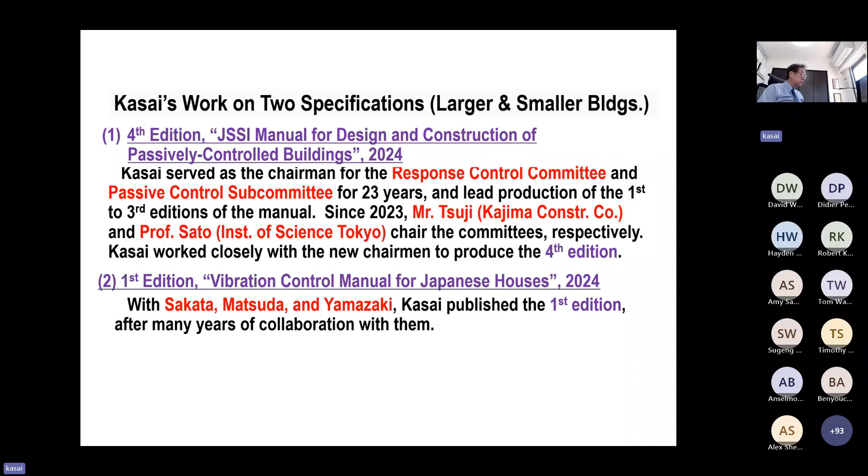Now, coming back to JSSI, the fourth edition includes these: oil damper, viscous damper, viscoelastic, steel damper, friction damper, and inertial mass damper. Today, except for this inertial mass damper, which is new, I cover all these dampers. At least I mention them because some of the examples use those.

Oil damper uses very thin oil without much viscosity, no viscosity. This one uses very sticky oil, which has a very high viscosity. And viscoelastic damper is more like rubber, having stiffness and damping.

Sometimes it shows an ideal ellipse. Sometimes it shows a rectangular hysteresis at a bigger strain. We call this nonlinear viscoelastic damper, which is becoming very common in Japan. And steel damper shows this hysteresis familiar to you. Friction damper shows this kind of rectangular hysteresis. And inertial mass damper, because of inertial force created inside, the hysteresis becomes negative - it has a negative stiffness in this one.

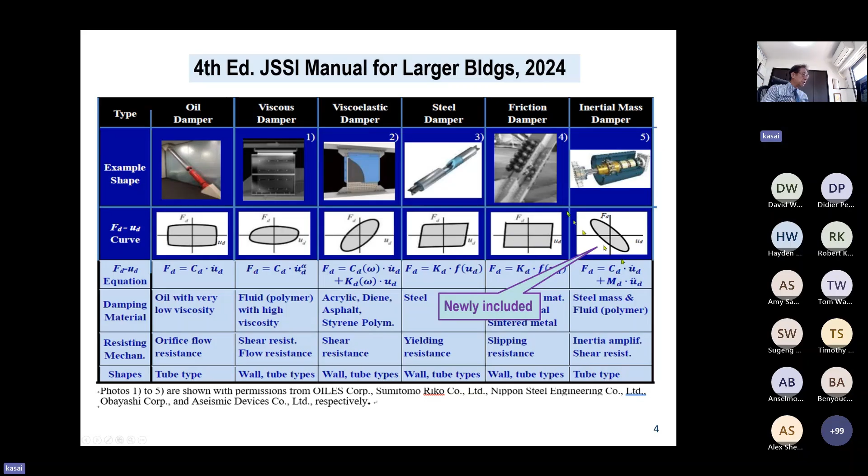Now, in addition to the dampers, we have various systems, which is very important. It's called directly connected system, wall type. It's connecting upper and lower beam. Therefore, story drift goes directly into the damper. Very, very effective. And brace type also.

The damper deforms most compared with others. And also shear link type. I want to show this and this too as examples.

And also stud type. This is indirectly connected system. The reason is that top story and bottom story drift, and you have a force here, and then this causes a bending of the beam, and also column too, due to the damper force. Therefore, damper does not deform as much as these, not ideal.

However, architects like those because of the openings. Also, bracket type, I call knee brace. And this one also, sometimes they prefer, but it's not so effective because, again, this pushes the column and the column deforms. This deforms less.

Special system, toggle type, amplifier type are called. So these systems I'm going to cover today.

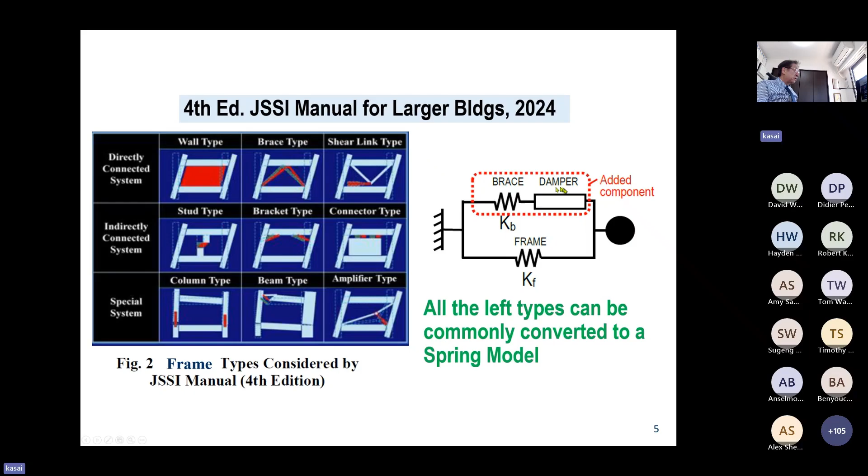But in those systems, very important, just like I say here, if there is a damper here and a brace here, if the brace is soft, then the brace deforms and the damper does not deform, then it's not going to be effective. So like this one, if the damper deforms, but the other one, this is like a brace, if the brace deforms, it's not effective. So this is what you have to consider.

And also KF. If KF is very, very stiff, like a concrete building, then these cannot take so much load. Most force goes to frame, then the damper is not effective. Therefore, damper and brace must be stiff enough.

So in summary, the vibration control effectiveness depends on balance of three properties: brace stiffness, frame stiffness, and damper property or stiffness. So considering that and an ideal response spectrum, we develop performance curves.

This is showing displacement reduction here and force reduction relative to 1. That means if you have no damper, the force and displacement are 1. And if you use a damper, for example, this Ka divided by Kf, there is a Kf only here. But if Ka, damper stiffness, increased, the displacement decreased.

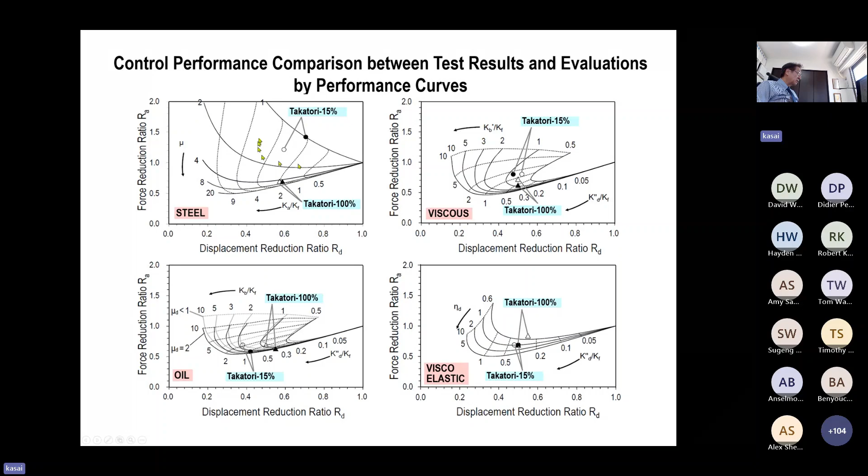So this one really talks about the balance between brace and damper. The brace effect is included here inherently. Okay. Then,

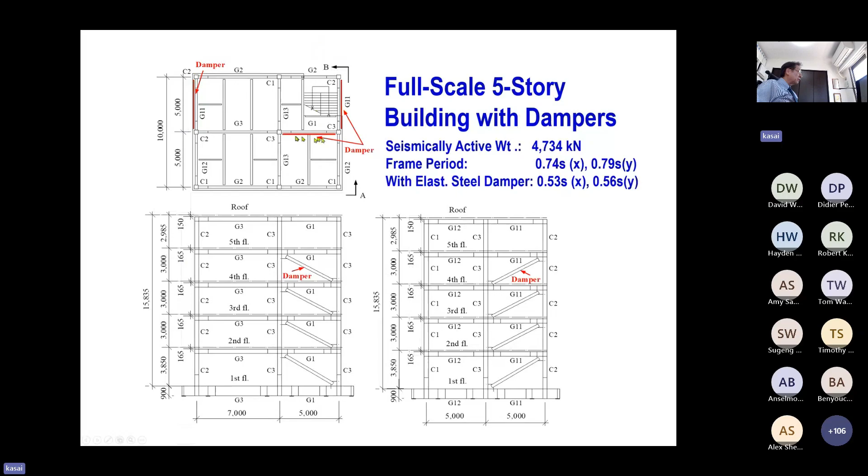For example, we did an E-defense test for the 5-story full-scale building. I was a team leader for this one. And there are dampers here and here. From 1st to 4th story, we had dampers. There are 2 dampers in this direction and 1 damper which is 2 times bigger in this direction. And we compared that one. I'm sorry, I think I'm skipping that.

Okay, we compared that damper with, for example, here, our prediction with result from E-defense for damper yielding and developing ductility of 4, which we consider is best for the steel damper. And so it worked very well.

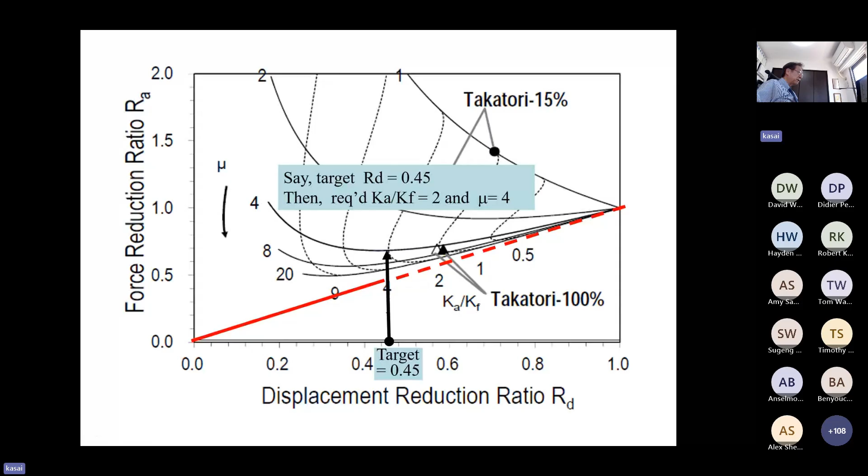We confirmed with other viscoelastic ones, oil damper, and viscous damper. I'm going to skip those. The important thing is this performance curve can give you, for example, the difference between a free steel damper and a friction damper. Both are considered to be bilinear dampers.

If the displacement is reduced to 0.45, then we have multiple solutions, design solutions. One is to use ductility 4, with this stiffness, Ka over Kf equal 2. And another solution is here: Ka over Kf equal to between 2 and 4. So it's 2 and 4, so 3.

And in this case, as you can see, the damper is stiffer and exhibits more ductility demand, mu equal 8. Steel damper cannot tolerate such a big ductility demand, but friction damper can. And so, but the friction damper has to be stiffer. So this one is a very important aspect.

As long as you can make a very stiff elastic stiffness, then the required damper force here - this is a frame up to this drift - and so frame force is this one, but damper force is this one. This is friction damper force, and this is steel damper force. So you can see that the required damper force for the latter, friction, is only 50% of the steel damper. And so sometimes, of course, steel damper is very preferred very often, but friction damper has advantages like that.

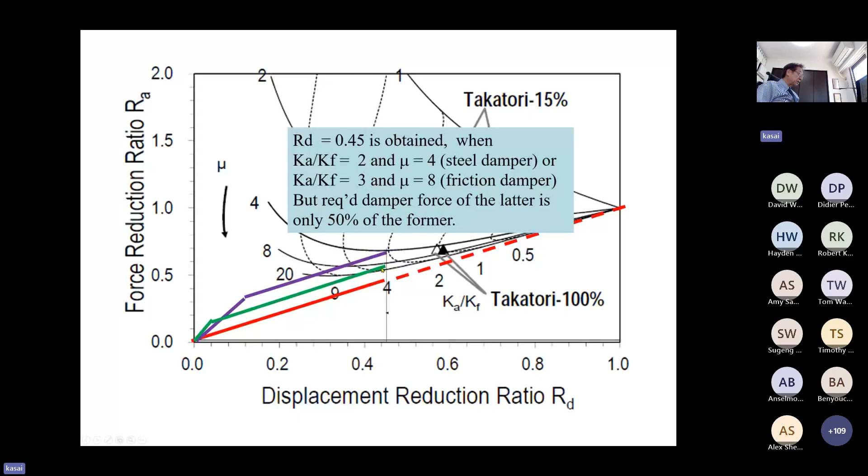I'm going to show that example later.

Now, I guess an overview of RC building retrofit methods in Japan. These are probably very similar to yours, so I'm going to skip through quickly.

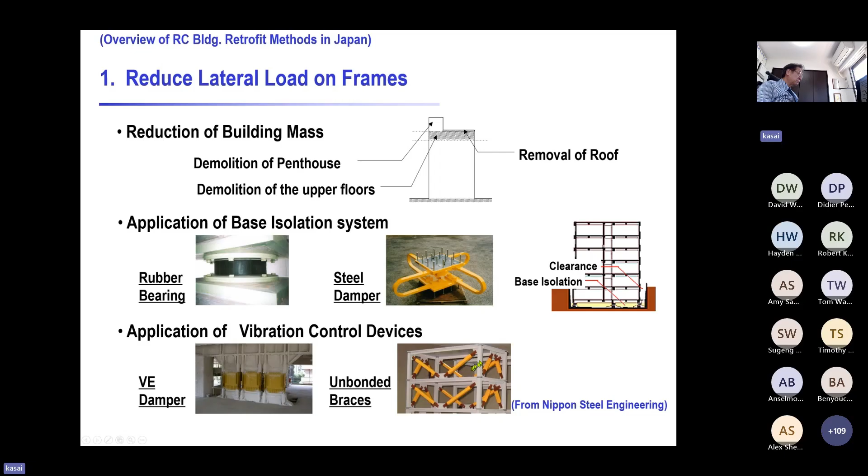Firstly, number one is to reduce lateral load on frame, which is very important. Mass reduction can do that. Another one, base isolation can do that - it can reduce the force on the frame. Also, put in a vibration control device, and it takes the force. As long as this is stiff enough, the frame force, lateral force on the frame, will decrease. So that's reducing lateral load on frame.

Another one is to avoid concentration of force and deformation into the column. Even without a damper, we have to do this, right? You want to prevent shear failure of short columns. And overall, avoid concentration of deformation into columns due to building torsion. In the Christchurch earthquake, you had this - the CTV building collapsed just because of torsion. Exterior columns got so much deformation demand.

Another one, E-Defense - I conducted tests and just let it collapse. A soft story: the first column got concentration of deformation. Another one, pounding during Mexico City - I worked on pounding too. This is the case where the floors are at different levels, so some floor of one building really hits the middle height of the column of the other building.

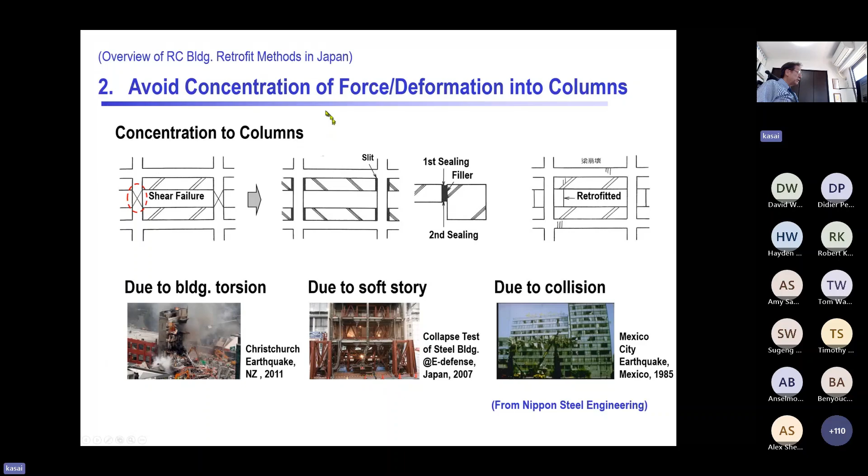So you really have to avoid concentration of deformation into columns, whether damped or not. This is very important. The third one is to strengthen frame members, each local strengthening. For example, if a column is too slender, you can make it stronger, with steel sheets for beams and columns like this, and also carbon fiber, etc.

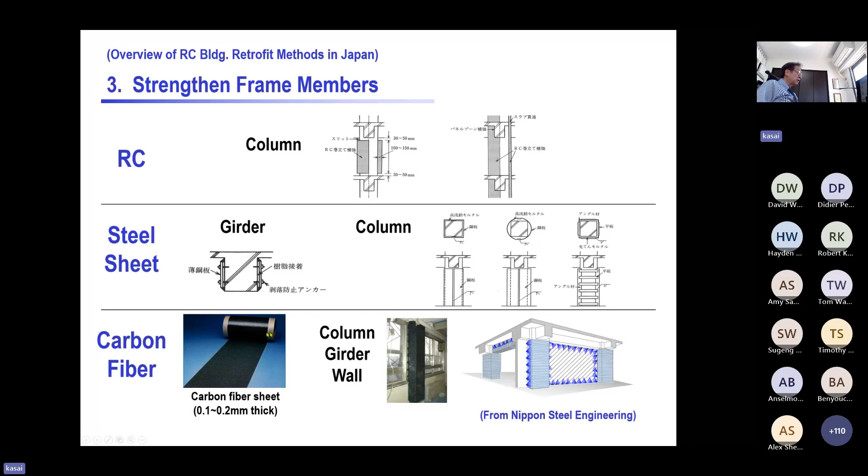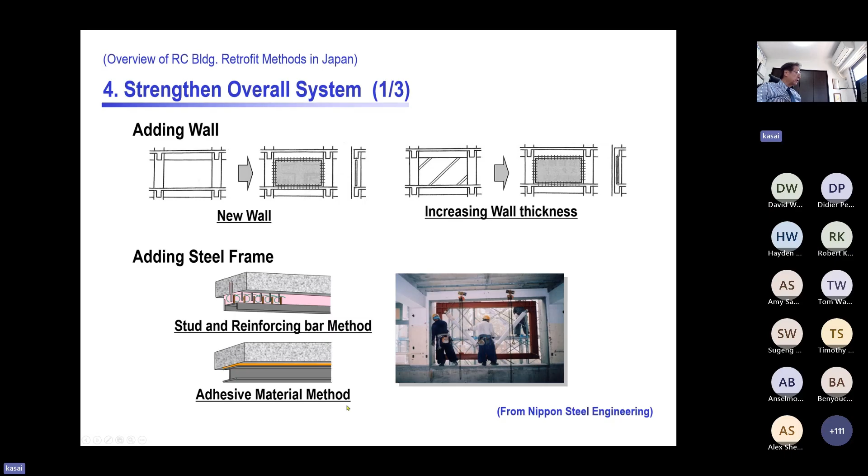Then finally, after members, you can look at overall systems. For example, if a wall is not there, you can put a new wall, or increase wall thickness by adding concrete. This is very often used for dampers - adding a steel frame. The steel frame takes the damper force, and is attached to the concrete frame using studs and spiral reinforcement typically, or using adhesive material. These techniques are used for dampers.

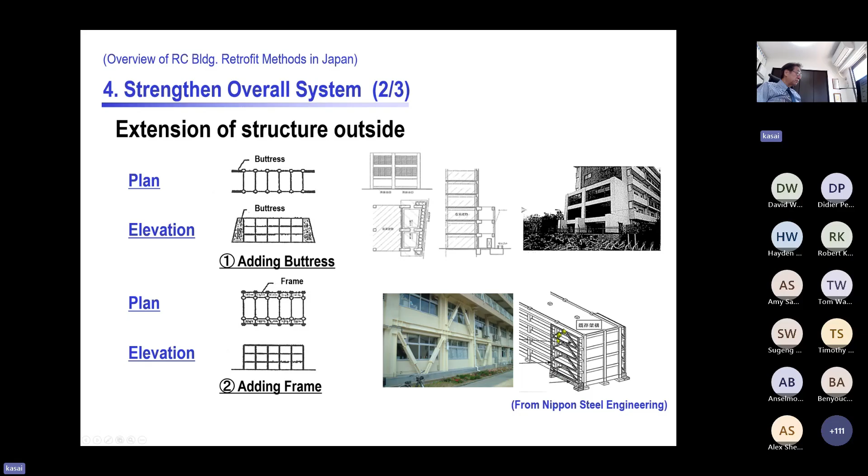Now, strengthening the overall system, second one: you put the buttress on the elevation and plan. For example, in this case, the balcony is too thin to translate damper force to the building, so you have to increase the thickness of the balcony and slab on the elevation. Okay, you add this one. That's what I'm going to show.

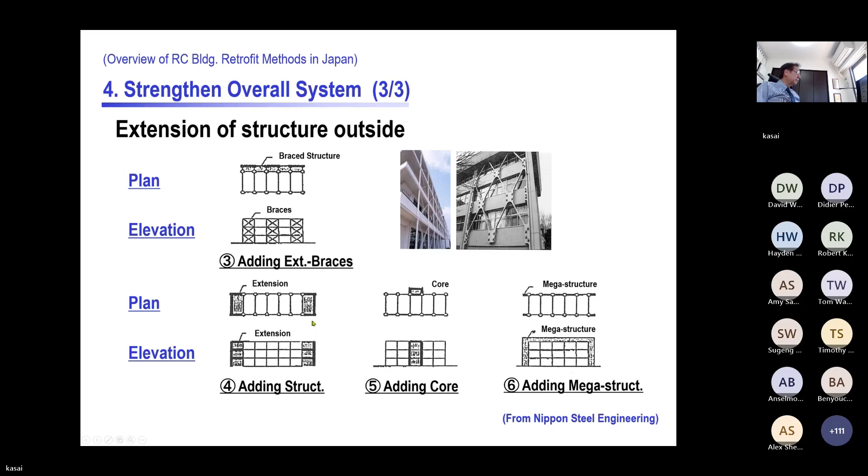And number three: extension of structure outside, brace structure, adding external braces, adding a core, adding structures if you have some space. Okay, so much for the fundamental ones.

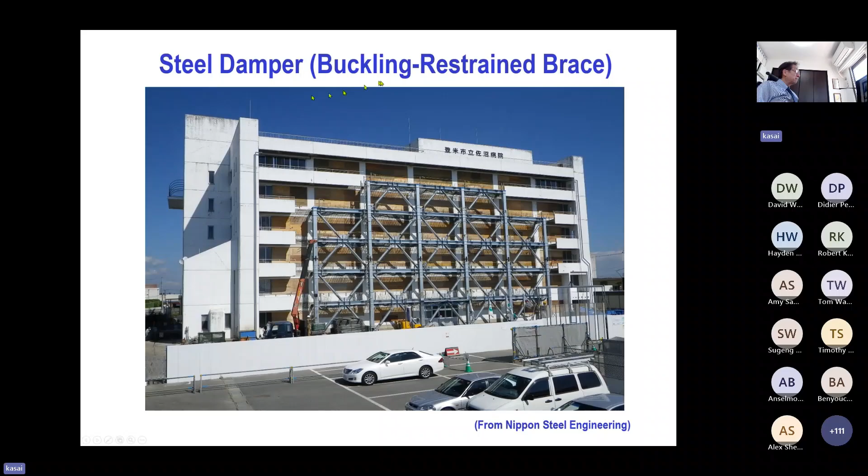Let's talk about four retrofit schemes. Now, the first one is a steel damper, buckling-restrained brace. This is outside the frame, and there's some space here between. So they try to use the floor slab and balcony to connect this one - just to utilize the balcony, yeah.

Another one - I want to go through this quickly because it's the same with this friction damper regarding how to connect. Now, steel damper, buckling restraint brace, I assume everybody knows about it, so I'm going to skip it.

But this friction damper, there are many types of friction dampers. Especially this one from Professor Kitajima, Nippon University, who used to be an engineer at Asunaro Aoki Construction. By the way, I have to give credit to Nippon Steel Engineering on this one, producing the buckling restraint brace, and they gave me this presentation. This one is from Kitajima, and this is the mechanism.

When an earthquake comes, this exterior or interior cylinder moves right and left. Then the copper is attached to the outer cylinder, and steel is attached to the inner cylinder. There's internal pressure created when they insert copper into the ring, and it's tapered, so that's very simple. Then you get a very big fastening force, multiplied by a 0.3 friction coefficient, which would give you the damper friction force.

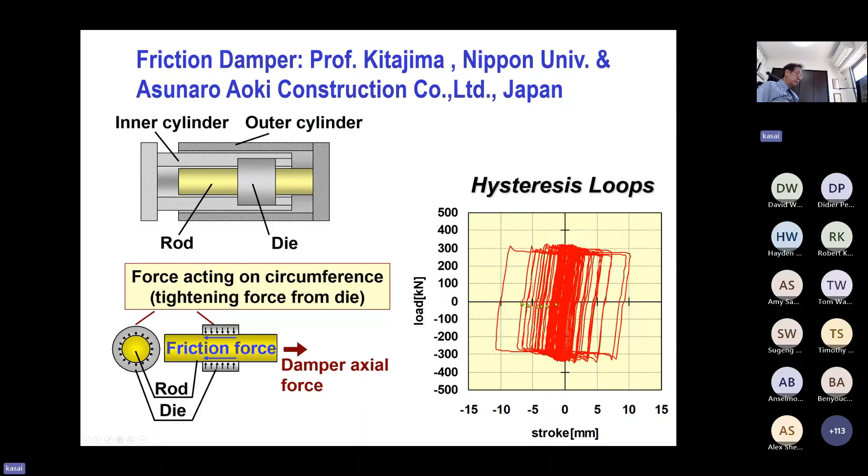But this one cannot be so big, and it's probably limited to 300 or 400 kilonewtons. So you have to use many, which is sometimes advantageous, sometimes disadvantageous, but okay, here is one.

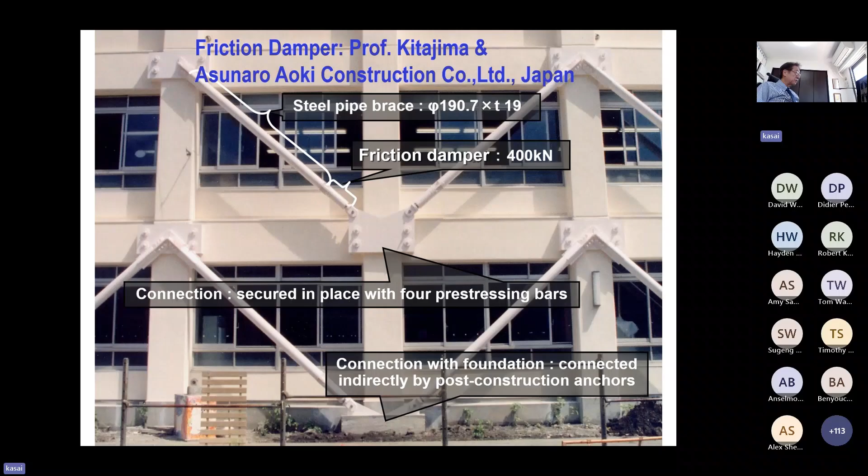In this case, the friction damper here is 400 kilonewtons, and the steel pipe is 190 millimeter diameter. The connection here - just because the damper force is not so big, the connection can be very simple. You have 4 studs, 4 anchors, and a pretension, post-tension bolt. That's good enough. And this is the process.

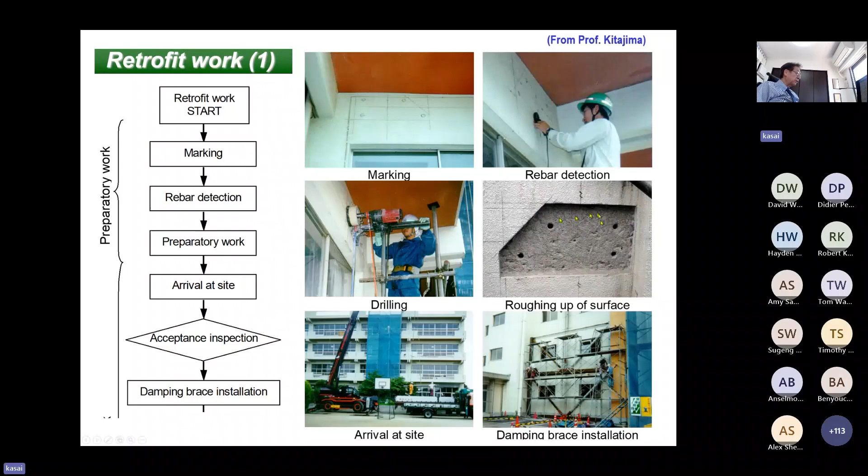This is typically a school building. You create the 4 holes here after rebar detection, drilling, roughing up the surface, and grouting it, and then you attach this.

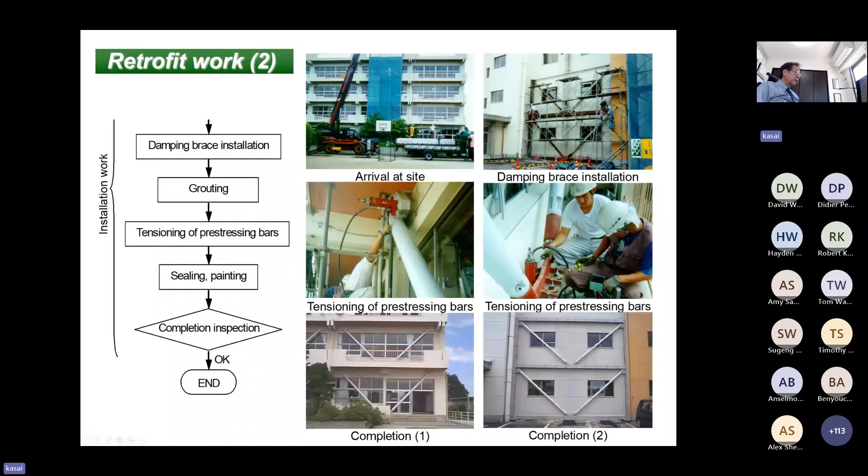A very interesting pseudodynamics test was conducted on an existing school building, three stories, which had to be demolished. They cut it here and here so they could put one brace here, and assuming there are many braces they could attach, they wanted to see the typical behavior of this building by pseudodynamics.

They put the actuator here on this remaining building, so it can push and pull the roof. This damper works very well, and we can measure the force of the damper by attaching strain gauges on the brace. But other forces we cannot measure.

However, if you apply top force only, the shear force of every story is constant, the same. But the damper takes this one, so the remaining part is the frame force.

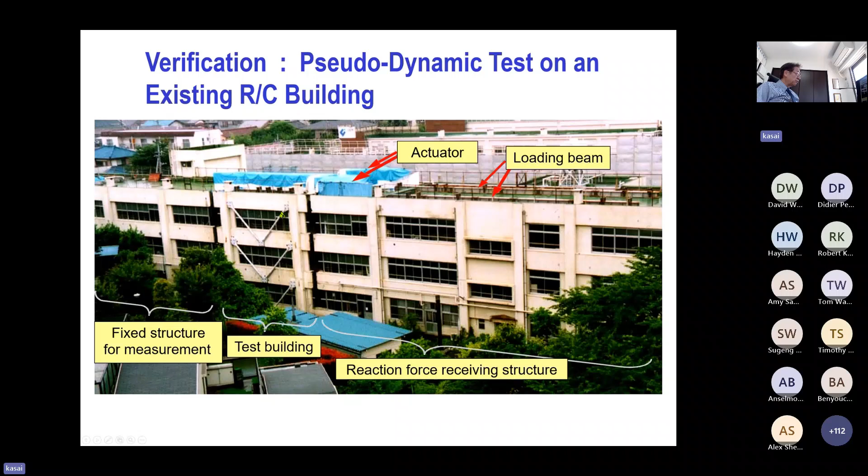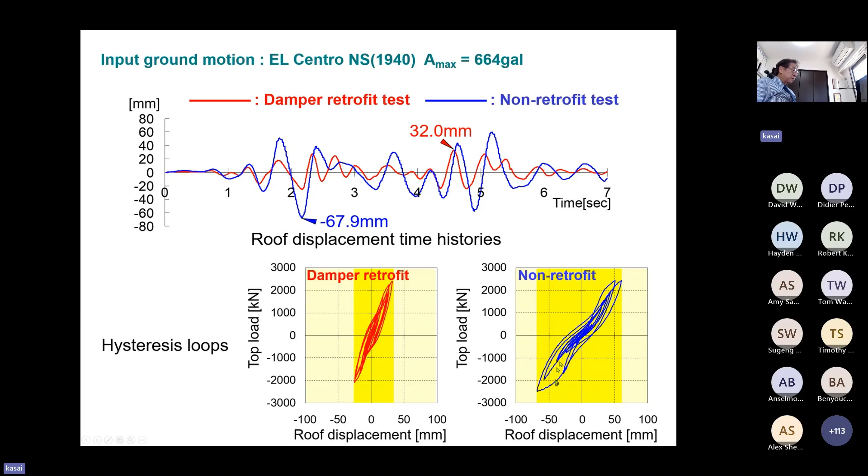After that, this is the reaction force. Of course the actuator can also measure the reaction force. So the actuator force showed this much force, almost similar. However, deformation is very big for the non-retrofit case.

They also measured damper force for the second story, and by taking out the damper force from the applied story shear, they could get the frame shear force. So when you have a damper here, you can reduce the seismic load on the frame like this.

Therefore, the frame tends to be almost elastic compared to the non-retrofit case. After this test, they removed the damper and conducted a non-retrofit test. Again, the force goes like this, and the deformation is more than twice.

If you add the force this and this, it's almost the same. However, the deformation can be very large compared with this one.

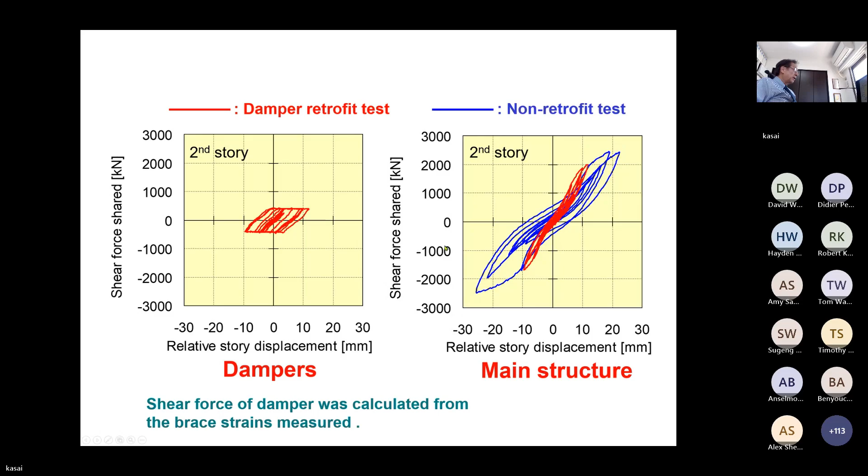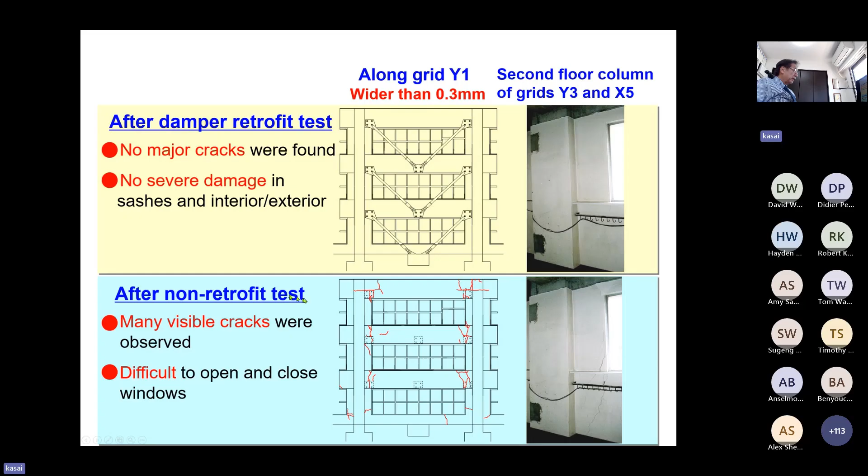This is also evidenced by cracking. With the damper, they could not see any severe damage. But after removing the damper and conducting the non-retrofit pseudodynamic test, they got lots of cracking.

Okay, so this is so much for the friction damper case using brace type, and also the steel damper case using brace type.

Also, an advantage of this toggle system is that each component is smaller, so they assemble that on site. They can transport it relatively easily to the site.

And the toggle system was used for Sendai City Hall. Sendai is often shaken by strong earthquakes, so city officials decided to use the toggle system.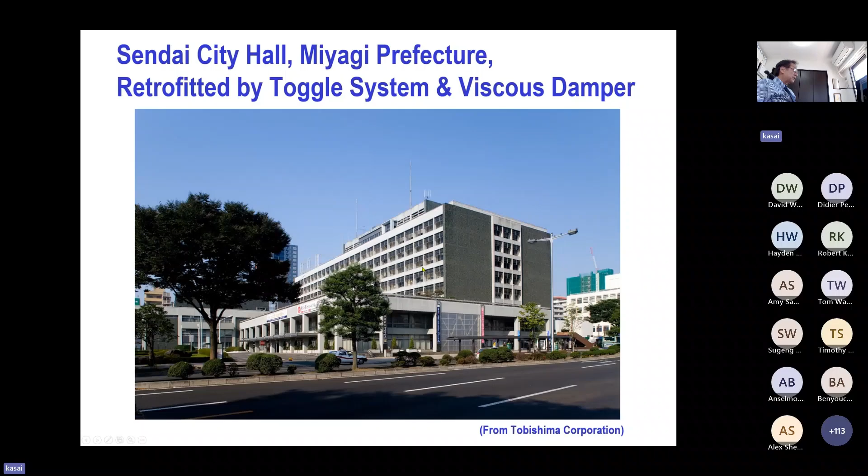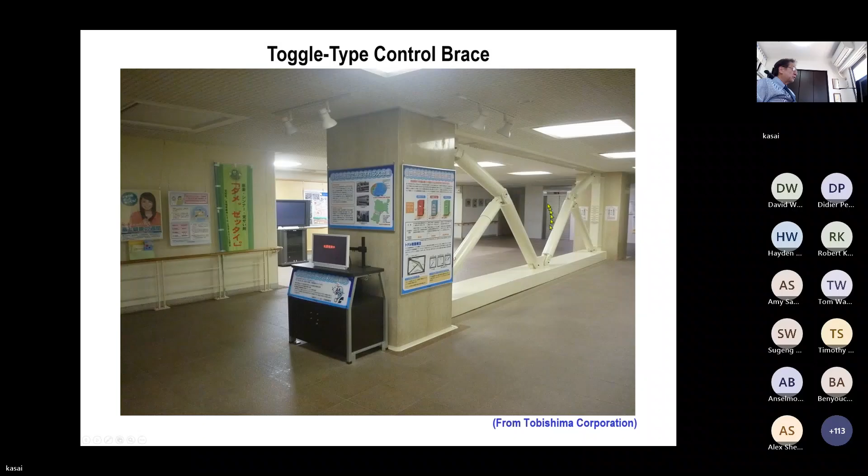Somehow the toggle system was put on randomly. I guess maybe there are some reasons. There was also some wall added. This is a typical view of the toggle system.

Kasai laboratory got some records of this building after retrofit, from the 2011 Tohoku earthquake. We processed it so as to get the damping ratio. The damping ratio is about 11% for the first mode, which is very nice, so the damper is working very well. And the frequency is 1 Hertz.

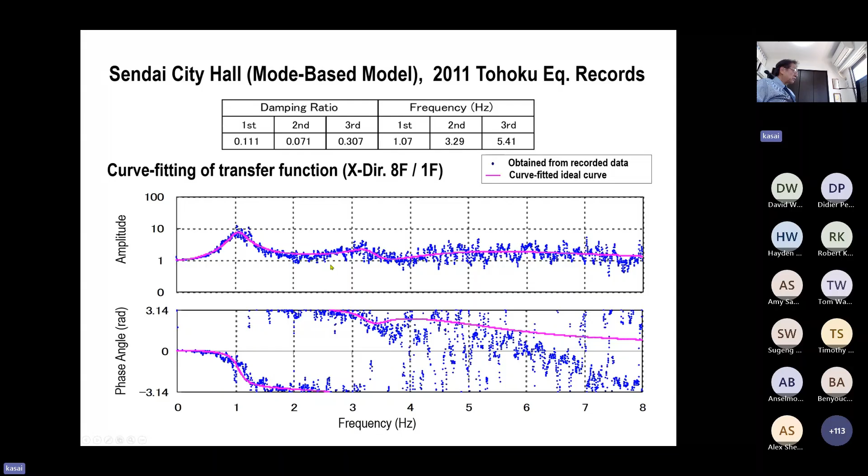That means we can use a model based on this. I'm going to show later. And this one, individual elements are modeled.

They made a shear model, but then every story you have to make it. This is 8 stories, and therefore you have to stack 8 stories. But this model is very detailed.

For example, slackness occurs here. There is a pin joint, there are many pin joints, so you have to model the slip.

You also have to model the flexibility of the brace. They can deform. Therefore, if they deform or there is slip going on, then the damper does not deform as much as you think, ideally. So it's very important to characterize those.

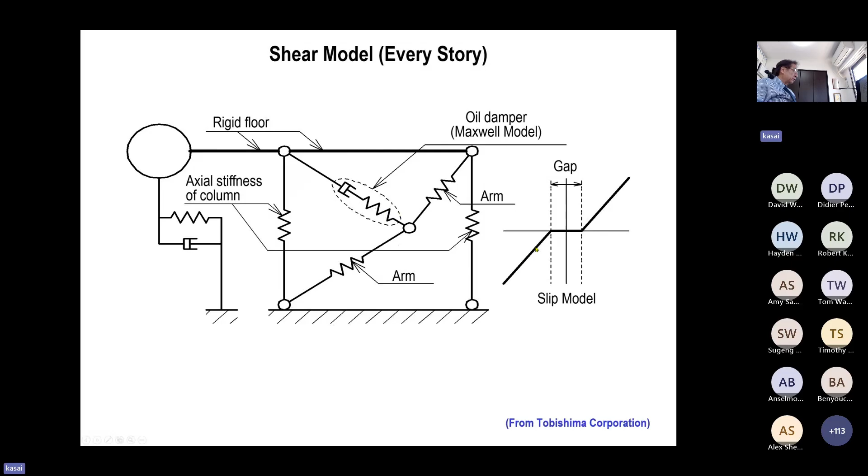And this is a result. Because of shortage of time, I'm going to go through this very quickly. The conclusion is that the building behaved almost linearly.

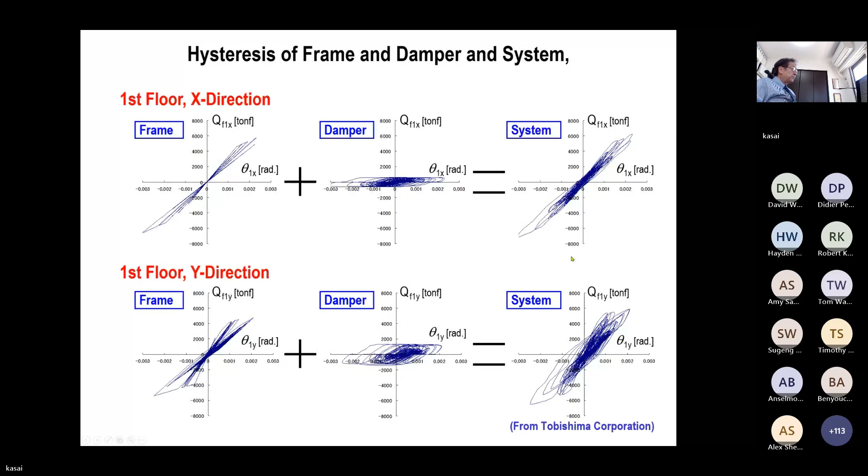This is a record versus analysis of the shear model. The record is in blue color, showing the relative displacement of the top floor, which was a double integrated result of the absolute acceleration, and also the absolute acceleration of the top floor.

Analysis seems to work well, except for this one. Mode-based model, of course, works reasonably well as long as the structure behaves roughly linearly. That's what I showed. Therefore, displacement of the top floor and also absolute acceleration of the top floor were very well predicted by the mode-based method.

And this one is very easy. So after the Tohoku earthquake, our laboratory really processed many buildings using this method, because it can take only half a day to make a model. But this shear beam model takes maybe a week or more.

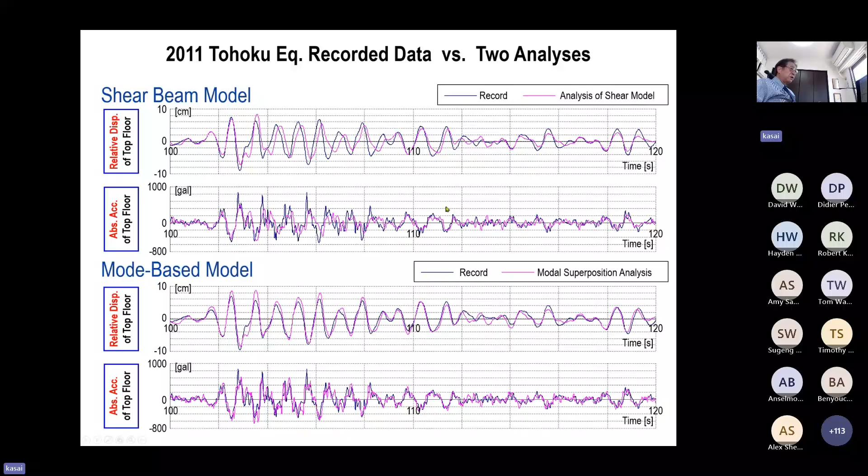But the shear beam model is very advantageous because, for example, once you analyze with a damper, you can also hypothetically analyze without a damper. And of course, the modeling is concrete, and concrete, after a certain limit, for example 1/150, really deteriorates. Therefore, concentration of damage to a particular story level happens, and this is really why we need to retrofit reinforced concrete buildings.

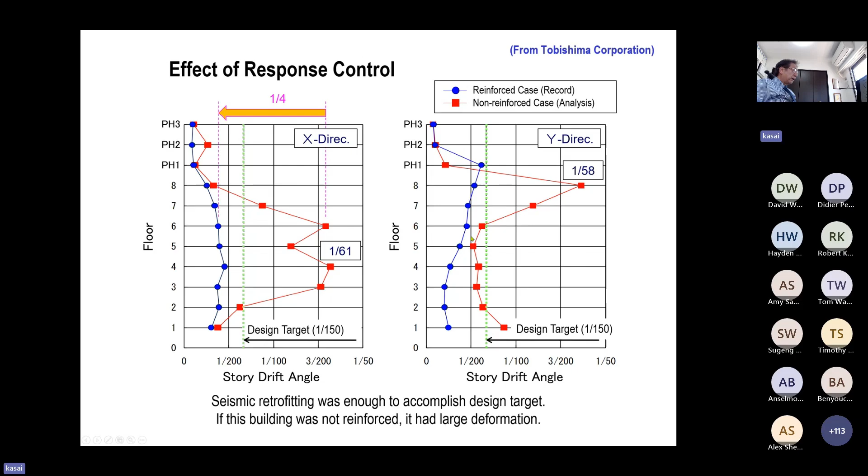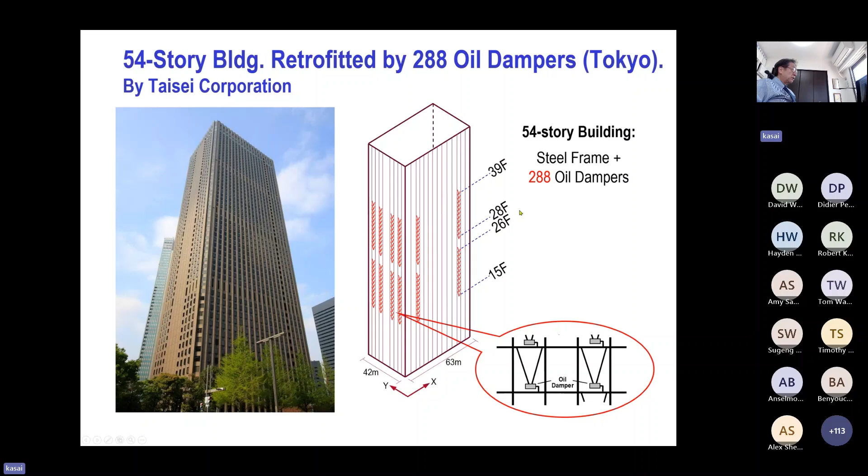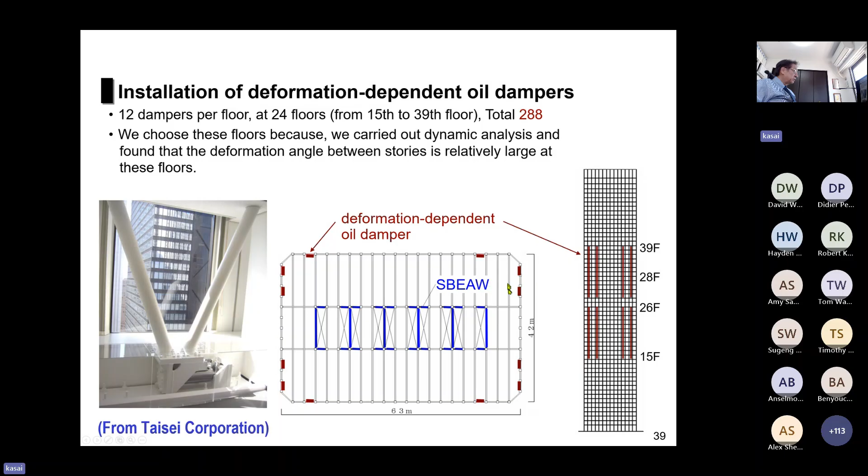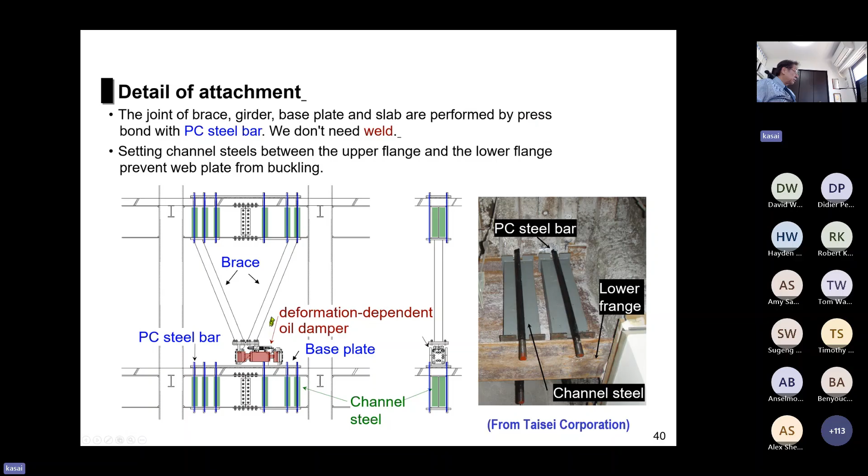This is not reinforced concrete, but a steel building. 288 oil dampers are used by Taisei Corporation, and this is a view. Actually they used the short span beam and put the damper inside. It's so close to the window that people could work in the daytime, so they did the installation only at night. They didn't use welding at all; they fastened through the slab to the steel beam by post-tension. This is the way they conducted it very effectively.

And there was a record, so we processed it using the mode-based method like I said. What we found is that our method worked very well matching the record, it correlated very well. After that, we found the damping ratio was about 3 or 4%. But we assumed 1% in that model. That means we used the same vibration period and mode shape, but we reduced the model damping ratio from 3-point-something percent to 1%, which is very typical for the undamped case for a tall steel building.

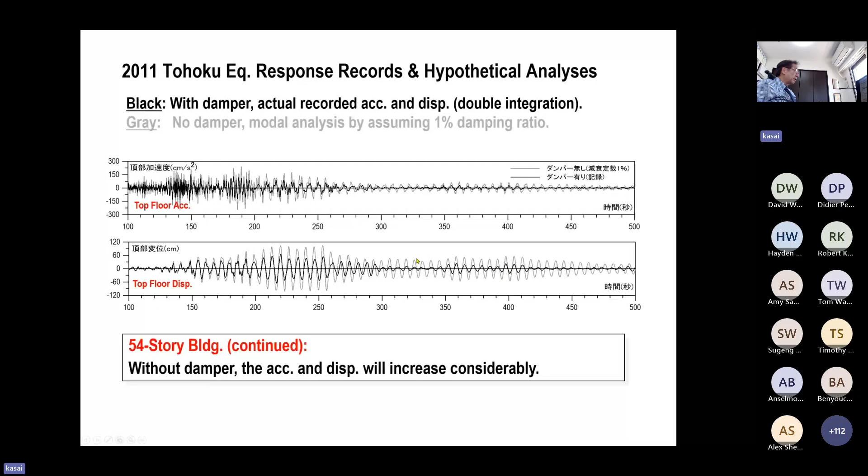Another thing is that after a certain number of cycles, you see that the one without the damper still vibrates, going through many, many cycles. That frightens people, and it can also create fatigue problems in the building and its non-structural components. So the damper's effect is very well explained by this.

Okay, finally, mitigation of torsional damage and collapse. I'm going to show two retrofit examples.

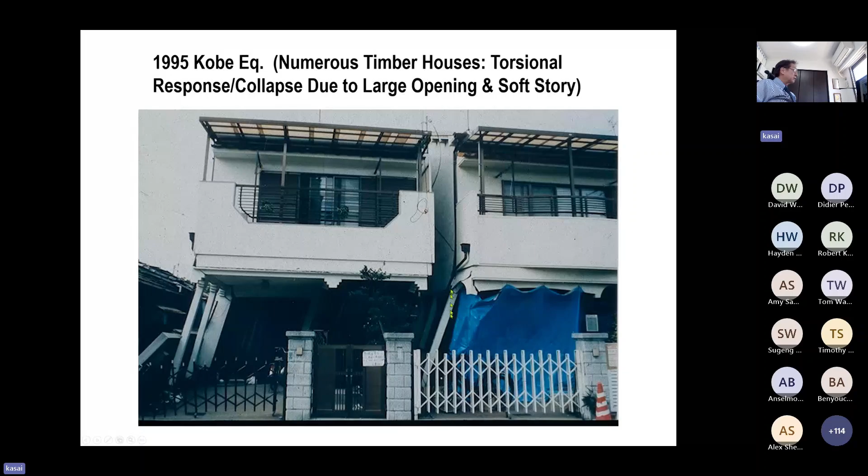There are also many houses like this. You have to have an opening because of a garage they want to use, so this side is very flexible while the other side is walled. So the building twists and collapses like this, just like torsional failure combined with a soft story column.

So working on houses, as I mentioned in the beginning, we explored how to address this using a knee brace type or bracket type, as we call it. We found that as long as we do it carefully, we can achieve a very good effect. Firstly, we found a very fundamental fact.

The problem here is the stiffness center. The center of stiffness is biased relative to the mass. Therefore, the translation and the rotation of this part work in phase, and this causes a lot of displacement here. Translation and rotation are in phase, therefore you have very excessive column deformation and story drift here, and very small drift here.

However, if you put the center of damping opposite to the center of stiffness, intentionally creating out-of-phase motion, it's a non-proportional damping case. Then you can eliminate the in-phase movement, creating out-of-phase movement instead, which can minimize this rotation. If you add this together, you will see that the translation is very, very minimized on this side.

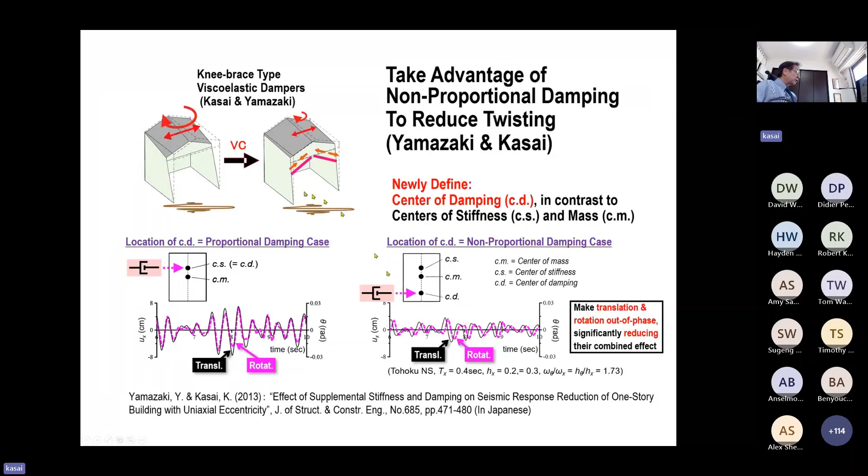Okay, another thing we have to be careful about is, as I mentioned in the beginning, you have a damper here and a column. The damper deforms, but the force applied makes the column deform too, so the damper cannot deform as much anymore. If the column is stiffer, the damper can deform more. So if the column is really strengthened, the damper can deform more. Therefore, the key point is really to keep the surrounding frame column very stiff.

So that is just our preliminary study. And after that, we got a practical opportunity.

13-story building retrofit using steel damper and stiff viscoelastic damper, reduction of torsional response, by Kasai, Motoyui, and Building Structure Institute. The presenter is our student.

Tokyo has been allocating $300 million a year to retrofit buildings that face emergency transportation roads, essential for post-quake recovery. During the 1995 Kobe earthquake, many buildings fell on such roads. Also, a building at the corner can interrupt two roads at the same time, which is very bad.

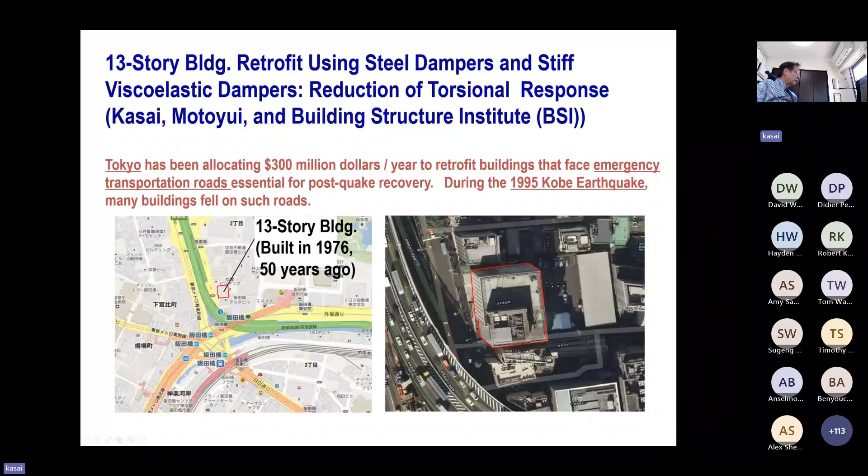So a 13-story building built 50 years ago, the owner decided to retrofit. This is the building.

Here is a stiff part, and here is the open part. Fortunately, inside there are beams here, and we can put the stud column, a stud damper, just like this. So we explored that option. There are 7 stud dampers in between the columns.

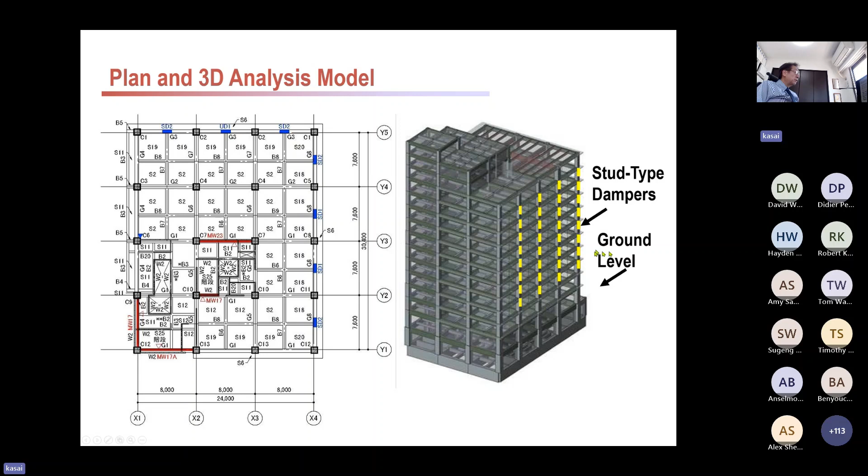And this is the one, the column, typically this size, and the beam is somewhat long span. Therefore, as I said earlier, we have to be careful. This stud damper causes overturning on this beam, and with such a long span, even though you have a haunch, it deforms and rotates. Therefore, it can reduce damper deformation and energy dissipation. So this is a disadvantage.

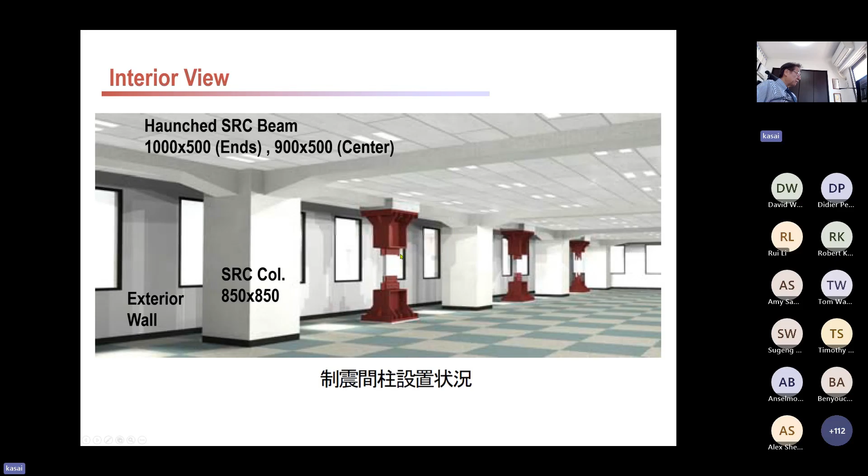However, it looks much better compared with a brace, and people liked it. Very typical detailed finite element analysis was done in order to fasten it to the existing beam.

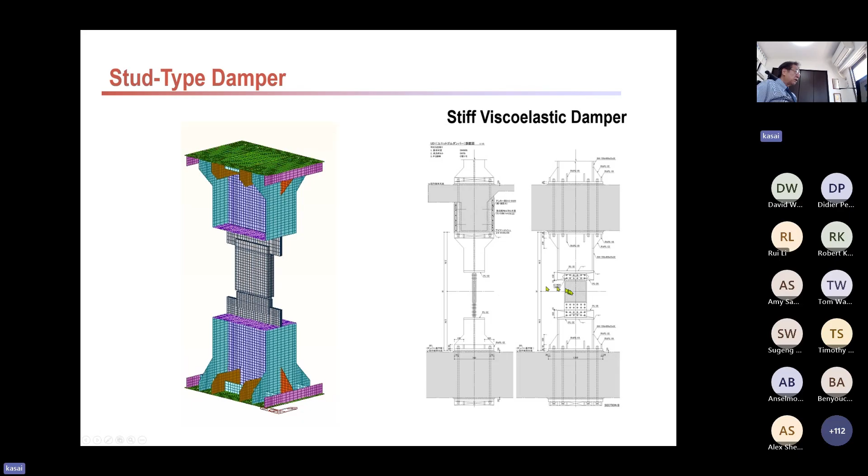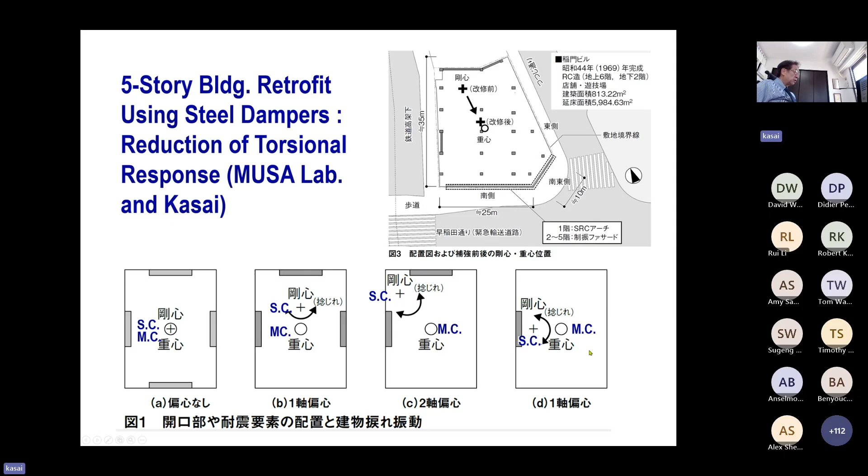Just these two surfaces were too flexible laterally, so we decided to put a very stiff steel brace. You don't need to put fireproof paint because outside they use weathering steel. You can see the color of the weathering steel.

Also, the force was directly going to a very stiff arch we created so that people could still access the building. Here, it was cantilevered, so it was really torsionally defective because only the inside column was taking the force.

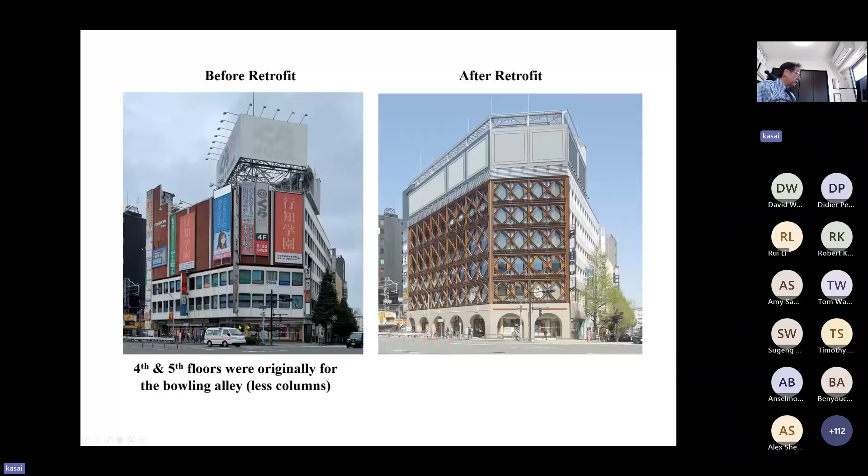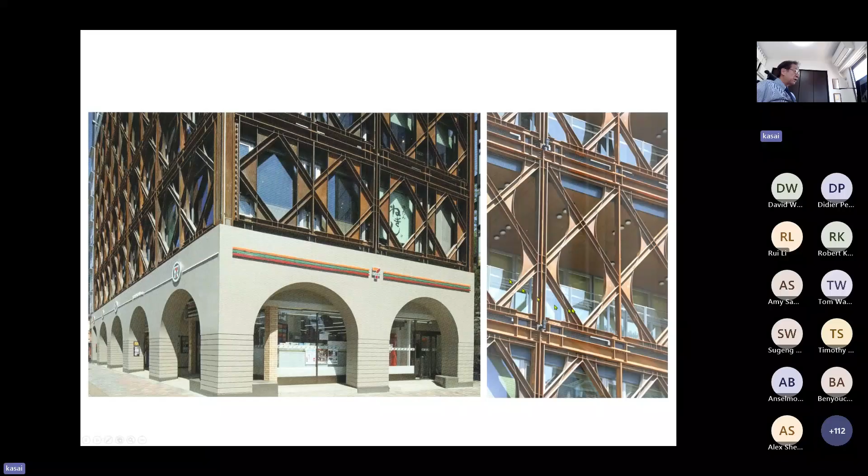This is a view of that steel truss. The damper you cannot see is in here, but I want to show it. Here is the damper, and still you cannot see it. Okay, here it is - this is the inside view.

By the way, this building got an award for the retrofit, the best award that year. The architectural design was done by a very well-known architect who also designed a pavilion for the Expo in Osaka.

The idea is this: originally all the building had an aluminum facade, which is very flexible. But we utilized this beam and fastened the steel beam here by stud. So here is the damper here.

Again, on the first floor, it was transferring seismic force from this slab to the internal column, which is very weak. Now this one directly takes force through the arch. This is the idea.

This upper beam is connected to the upper floor, and the lower beam is connected to the lower floor. This one is very stiff. Therefore, when an earthquake happens, this one is stiff but still deforms, and it is stiff enough to cause inelastic deformation of the link. We call this the link, or shear panel damper.

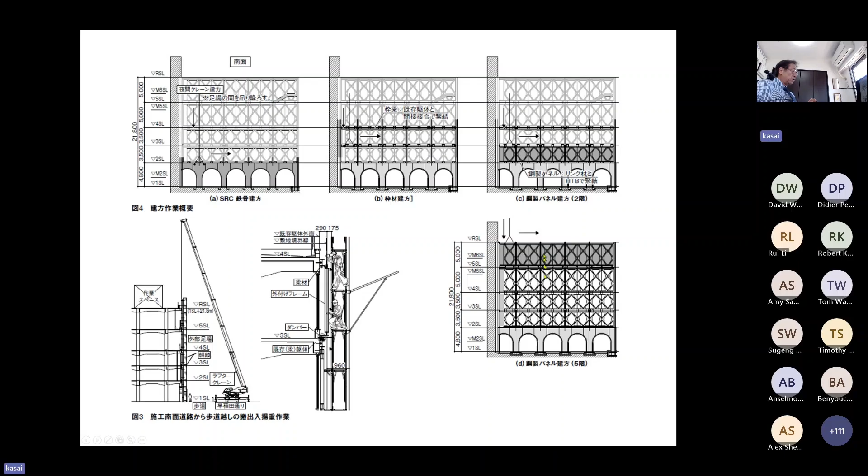Now this is the result. Let's look at the roof displacement. With x direction input, after retrofit—sorry, this is the third floor—after retrofit you see it goes like this, but before retrofit it goes like this. Just like I said, it's a two-way eccentric case.

So x direction input can cause y direction movement too, plus torsion. Therefore it's very complicated. This is a y direction input. After retrofit, it goes in the y direction only, not x. But before retrofit, because of the biaxial eccentricity, it goes like this, and deformation is about twice compared with the retrofitted case.

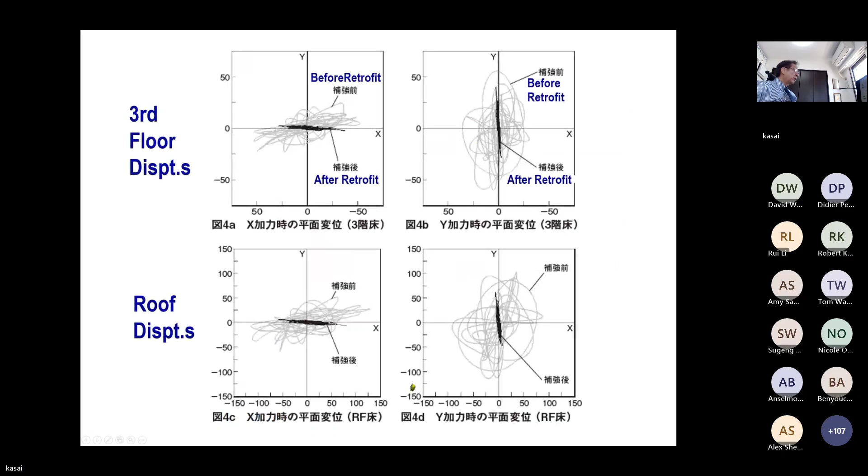Same thing with the roof. So overall, this three-dimensional analysis proves that our method of providing an exterior very stiff facade with many dampers works. There are 56 dampers; at every story level we had 14 of them. On the other side, you have a smaller facade, which has only 6. So in total, 56 and 18, 74 small shear links are used successfully.

Now, for the shear link, you know how to design it. This is a report published by Kasai and Popov, giving the proportions of the link. You have gamma A, the allowable shear strain, in terms of H over TW. For different aspect ratios D over H—1.5, 2, and 3—this is from Kasai and Popov's formula, now used by UBC and other American codes like AISC.

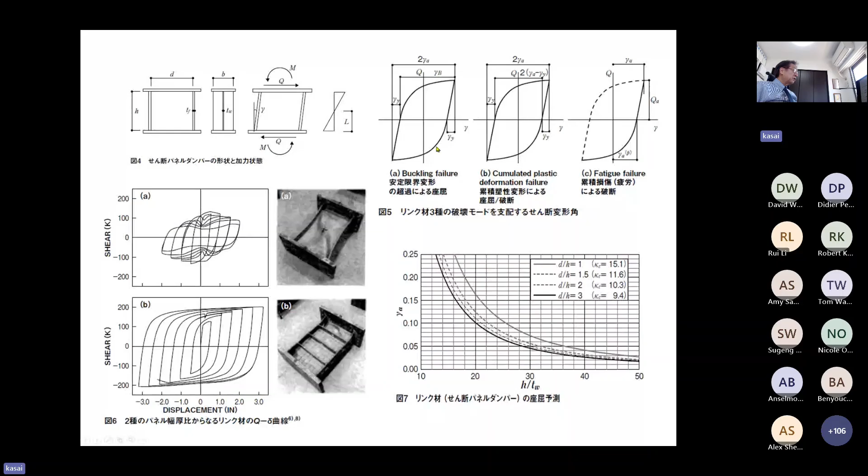We also have to prevent cumulative plastic deformation and fatigue failure. I conducted this work with my professor Popov, but the other criteria were very well developed by Japanese researchers. So we had three criteria to design the link used for that building.

But that's all I guess I covered. First, damper effectiveness, which is based on the balance between the damper, brace or surrounding members, and the frame itself. For reinforced concrete, the frame is so stiff, so dampers should initially have very high stiffness. Therefore, friction dampers tend to be very advantageous, because as you saw, the brace is very, very stiff.

Steel dampers, of course, like buckling restrained braces, have some stiffness. However, as you see inside, the core has a smaller cross section. Therefore, elastic stiffness is not as big as with a friction damper.

And then I talked about general RC retrofit schemes. They are probably the same with New Zealand. We covered 3 to 54 story buildings using different types of dampers: friction, steel, oil damper, and viscoelastic damper. This one also used an oil damper, and this one involved torsional damage collapse.

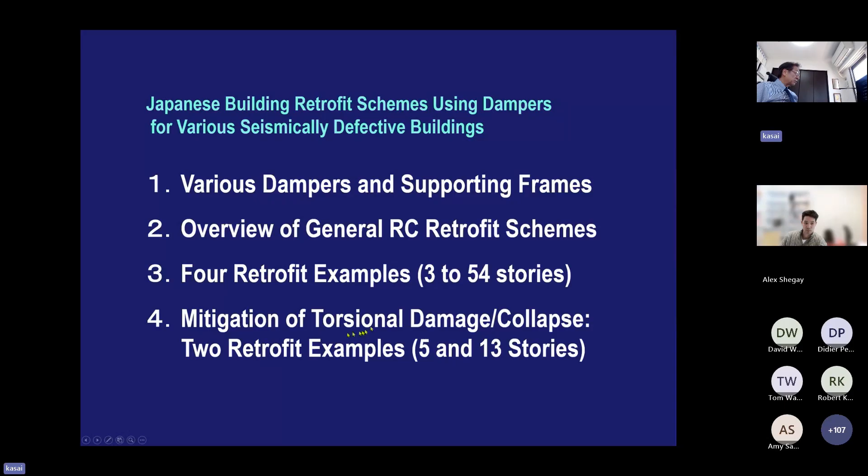We used 5 and 13 story buildings—one using a viscoelastic damper, and the 5 story using a steel damper, which can be designed by you. So we hope that the appearance is kind of unique. However, you can design a very stiff facade and put some dampers here.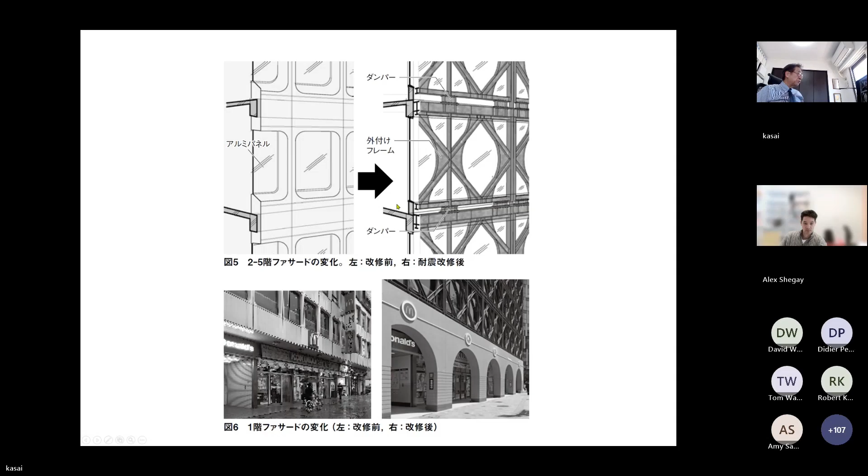The thing is, your target story drift for the concrete building is very small. Therefore, as long as you have a small drift requirement, your requirement for the damper is not so much. So this kind of low-yield steel can well take such shear strain. Please consider this, and if you have some questions, please let me know. Thank you.

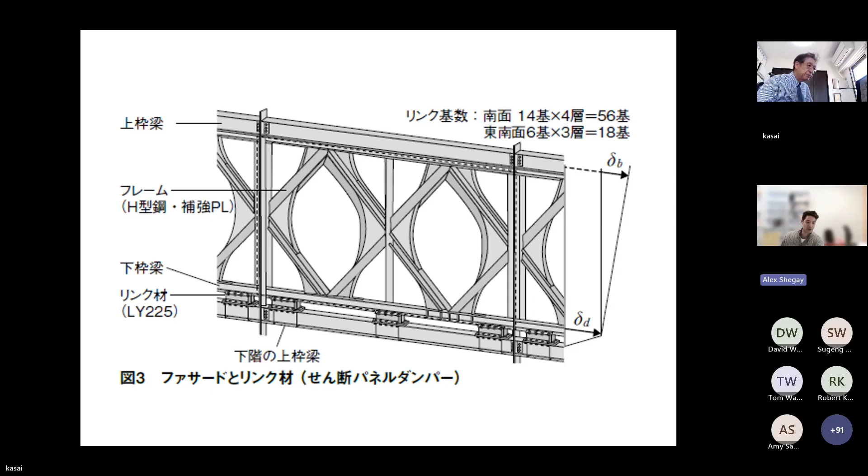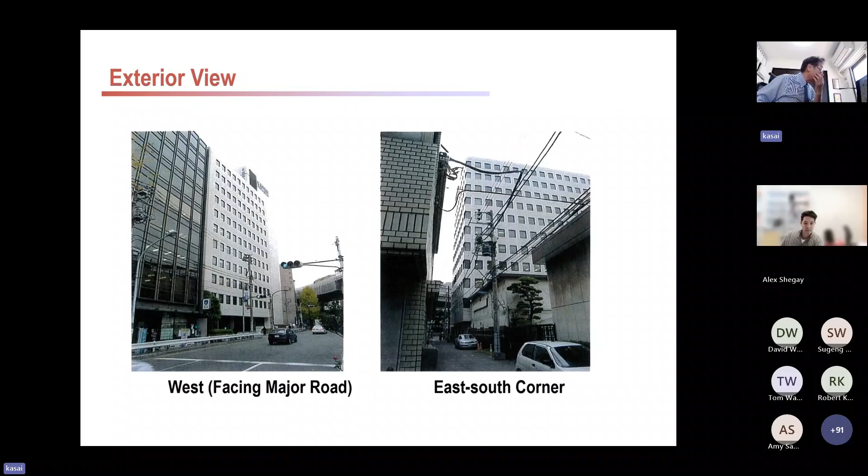There's another question here, shifting to the toggle type knee joint system you showed—this is with reference to that school building you showed with the pencils as the dampers. The question is, how do you restrain that free joint from moving out of plane? Which damper are you talking about? This is the knee joint damper—this one? Knee brace? No, the toggle system at the school retrofit.

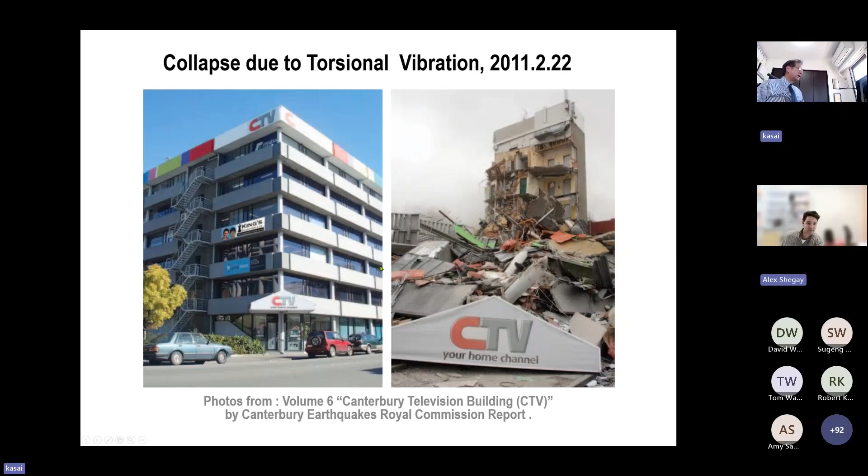Yeah, okay, the connection is very, very strong so that it doesn't go out of plane. You are right, you have to worry about out of plane movement on that one. It really does not. If you look at—let's see, can you see?

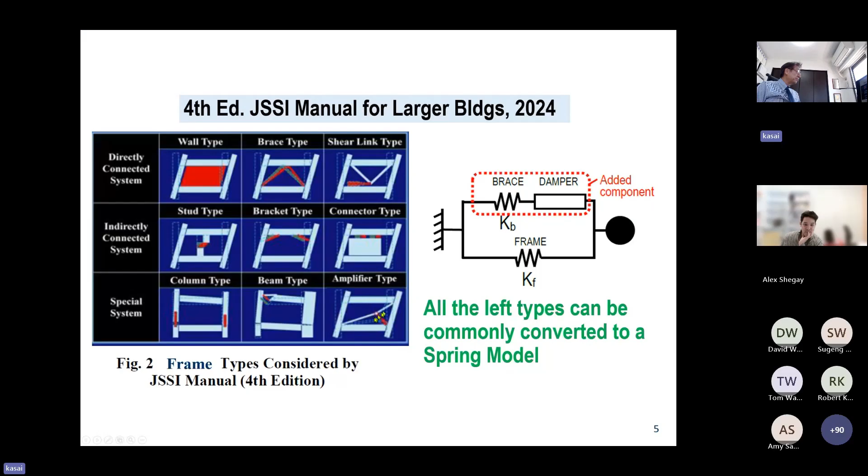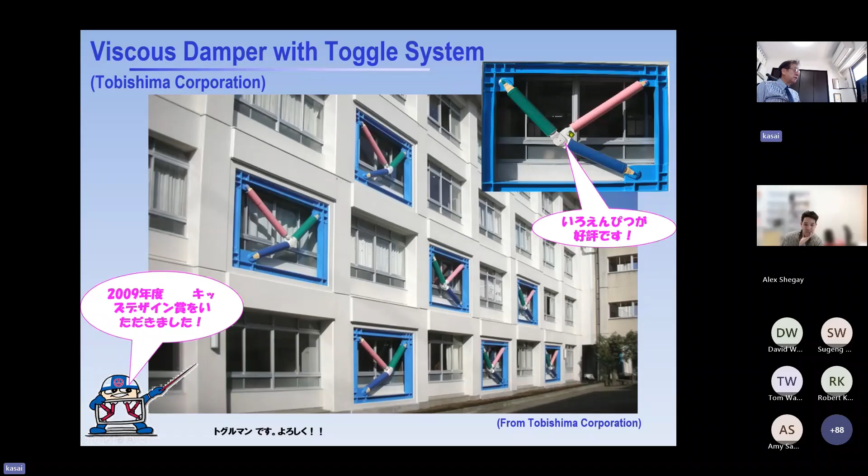We just see the first page of your presentation. How about this one? Yes, you're talking about toggle, right? If you look at this one, toggle system—after this, right? Here, this one, can you see? So that it doesn't go out of plane—you know, very, very strong. Of course it can go a little bit out of plane, but doesn't go further. This is really something they have to make sure of.

I have a question, Professor. One thing I forgot to say: if one component is under compression, the other component is in tension. You see, this is another reason.

Maybe I'll take the prerogative here to ask the last question, Professor—if you have any advice or techniques implemented in Japan to try to minimize the cost of these retrofits. For example, in Taiwan, sometimes they ignore the foundations in their retrofits to minimize the cost. It's not perfect, but it still seemed to work in past earthquakes. So I wondered if Japan had any, I'm not sure if you should call them shortcuts, but techniques to try and minimize cost of some of these retrofits.

I don't exactly know. I know some people still prefer conventional brace type, but as somebody asked today, conventional brace type can buckle. So just like this configuration, but the brace is straight, not bent like this. Then some support like this pink one can be another brace to support the brace, and that's a very cheap way of supporting it. You've probably seen this when you visit Japan, and this is one thing they may consider for the economy.